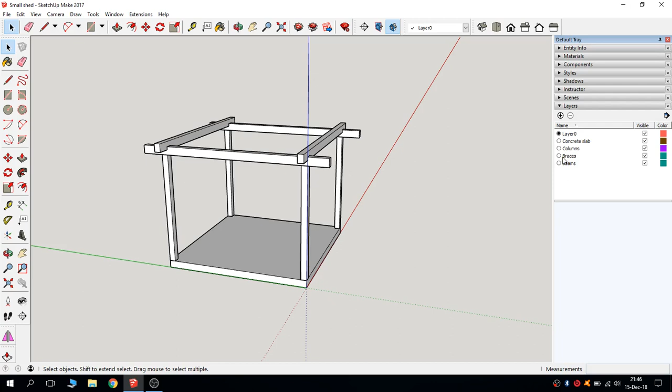Next thing we're gonna make are braces, so we're gonna make a layer called braces and activate it.

Now first we're gonna make braces that will tie this beam and this column. We're gonna use the tape measure tool and measure, for example, 70 centimeters.

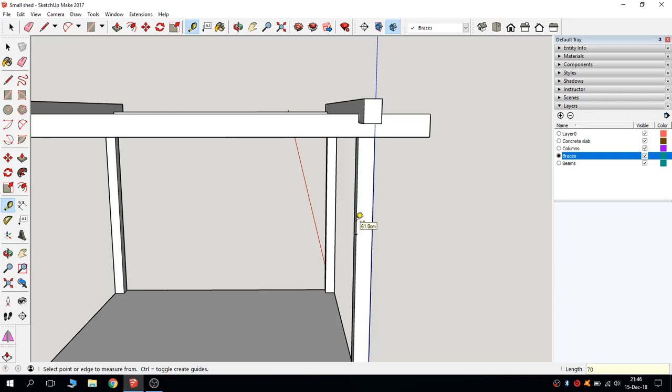Now we're gonna draw a rectangle in this point. Use the rectangle tool and type 14, 12 centimeters. Now we're gonna rotate this.

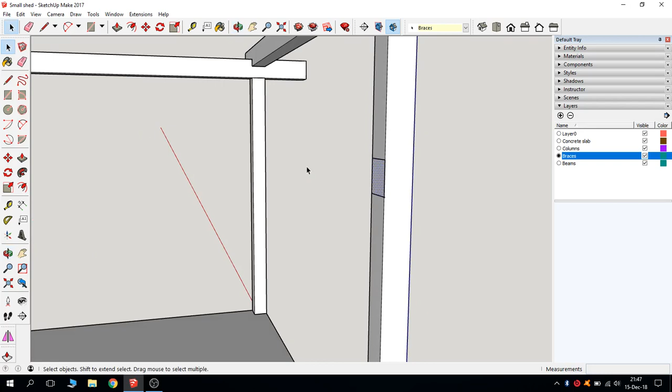Selecting this point, then rotate it for about 45 degrees. So this rectangle is now selected. You can check that by going to view and turning on X-ray, so you see there are dots. If it's not selected, you can turn on X-ray and then select it.

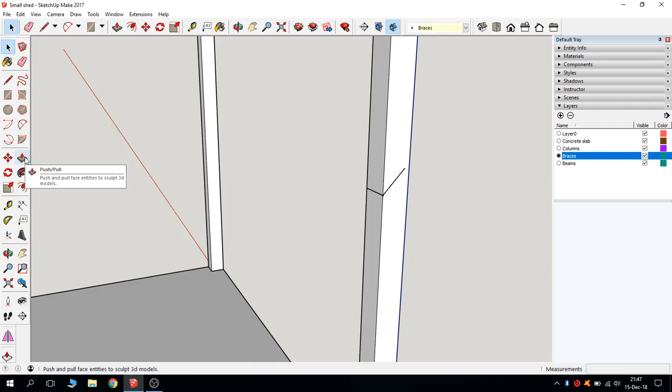Now I'm gonna turn off X-ray, select the push pull tool, and pull it upwards.

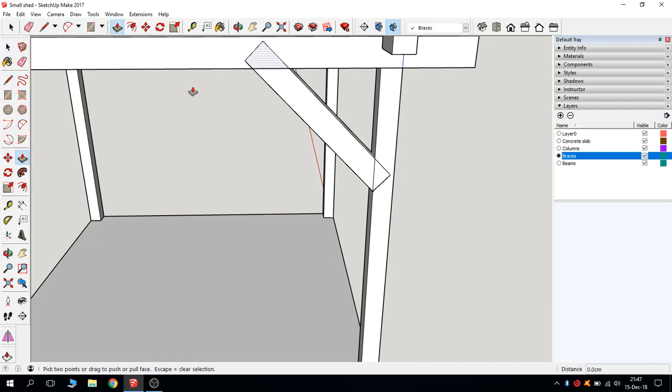Now we're gonna delete this surplus. We're gonna delete this dot. We're going to edit and delete guides, so it's not there anymore.

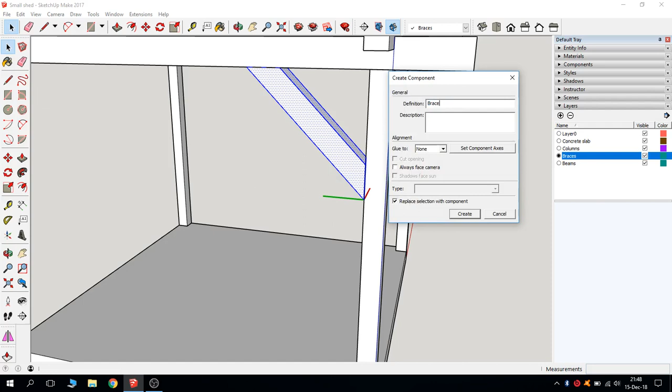Okay, we're gonna make this a component. Make component, and so call it brace.

Now we can move it to draw tenons. There's another way of modeling tenons - it can be modeled outside, then cut, then pasted in place when opening this brace. So we're gonna do it that way.

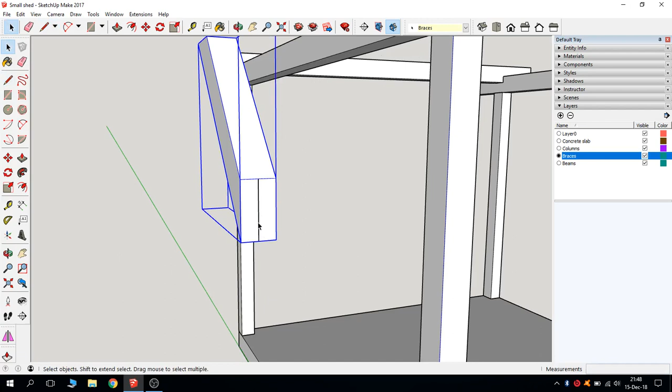So right now I'm drawing a tenon without a housing. If you want to make a housing, you can make it. So it will be 4 centimeters thick.

You can also go there for about 2 centimeters then. Okay, we don't need these lines.

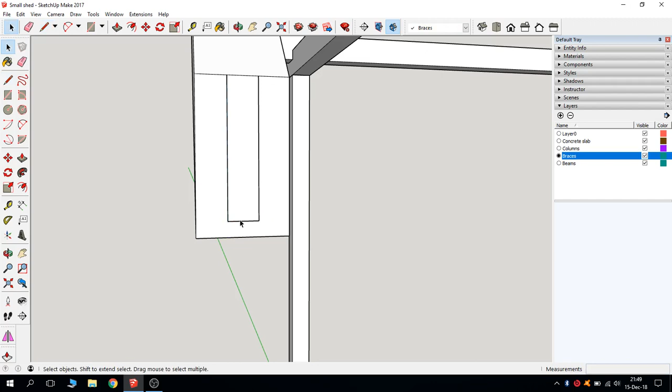Now we need to draw on this line so we can push pull it, and let's say 7 centimeters. Okay, so this is not possible, so we need to cut this triangle off.

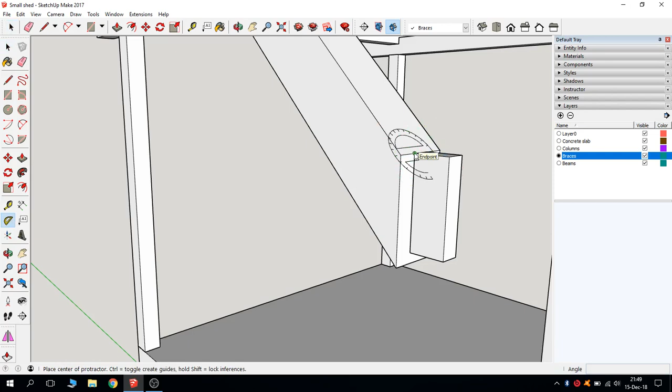I'm gonna do that by using the protractor to make a guideline. I'm gonna adjust this protractor with arrow keys. Now I'm gonna use a line, and we can delete this off.

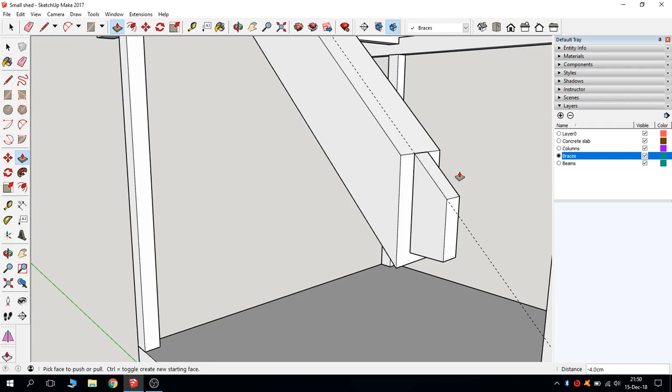Okay, we can delete this guide, and we're gonna turn this into a component. So make component, called brace tenon.

For brace, glue to any, cut opening, and this is really important to set the component axis. So we're gonna set them here, because we're gonna glue this tenon to the other end. So we're gonna create this.

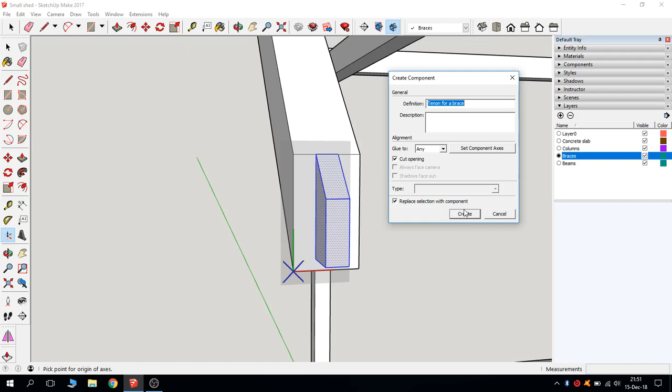Now we're gonna edit and cut it. Then we're gonna open this component and click on edit, paste in place.

Now right click and TF create joint. Now you can see it is a joint. Now we can make or add some pegs.

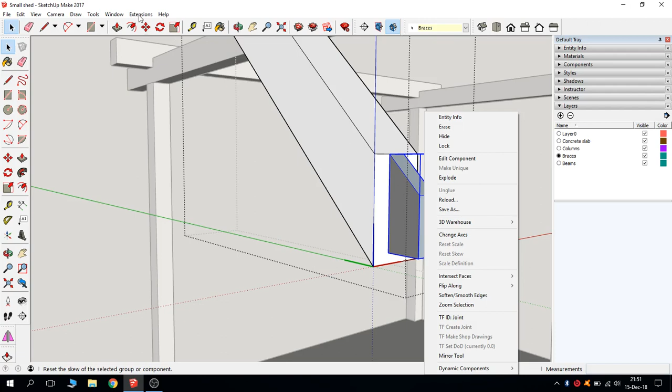So go to extensions, TF rubies, and TF peg tool. Click on this corner and type anywhere here. Then we're gonna change it, for example 7, 3.5, and we have our peg here.

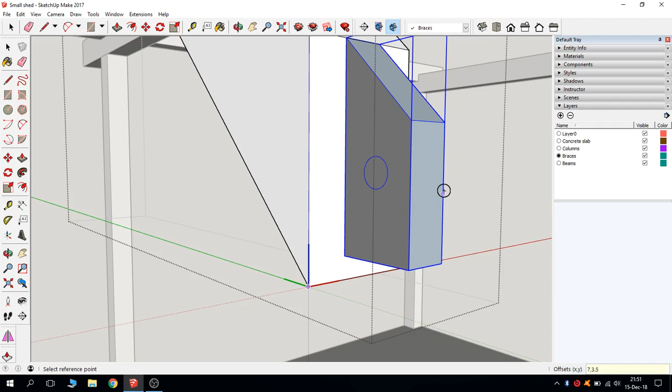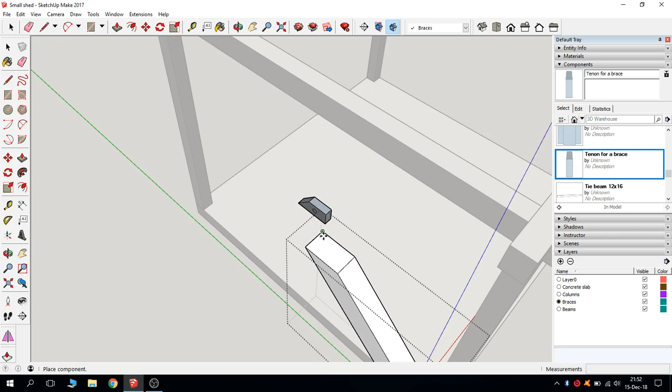Okay, now we can go to components, find our tenon for a brace, so it won't stick as it should, so we're gonna have to rotate it. Just be careful what dot you will use as a reference.

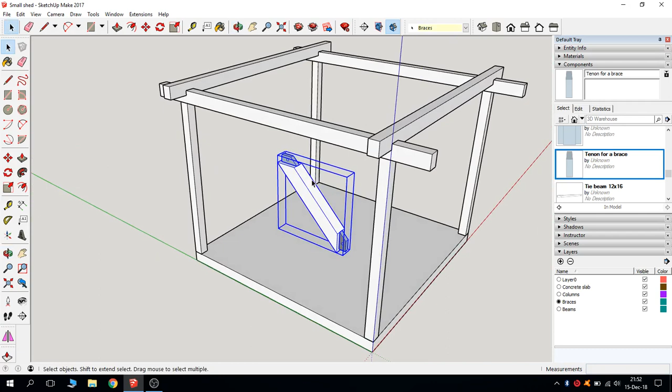And now we have our brace, so we're gonna put it back in place.

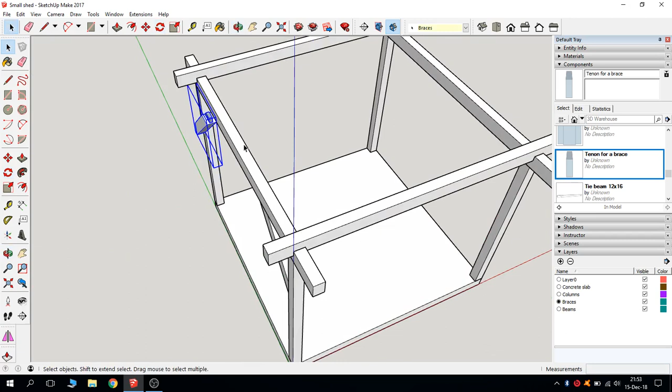Now we're gonna make a copy to this side using rotate, then press Ctrl, and now it's off because it was not rotated at the middle of this beam, but it's not a problem, so we will just move it inside of this frame.

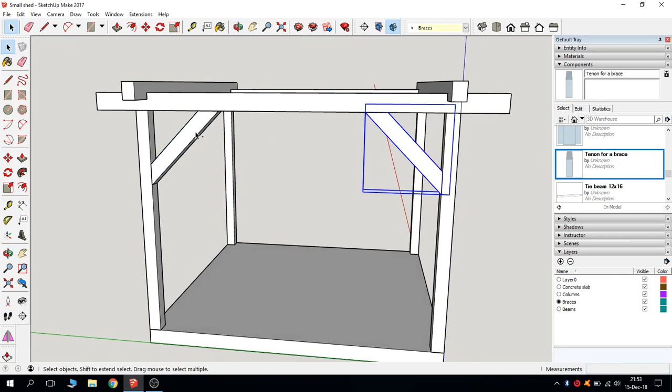So we're gonna select these, press Ctrl and select both of these, and copy them. Press Ctrl again, hold Shift, and we have our braces.

Now we need to connect this tie beam and post, so we can use the tape measure tool. We don't want our tenons to collide, so this should be shorter, let's say 60 centimeters.

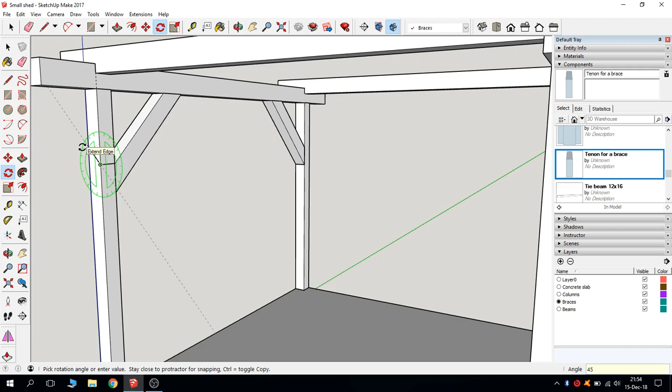Okay, so we're gonna repeat the process that we did before, let's say 14, 12, and again select it, rotate it, okay now push pull.

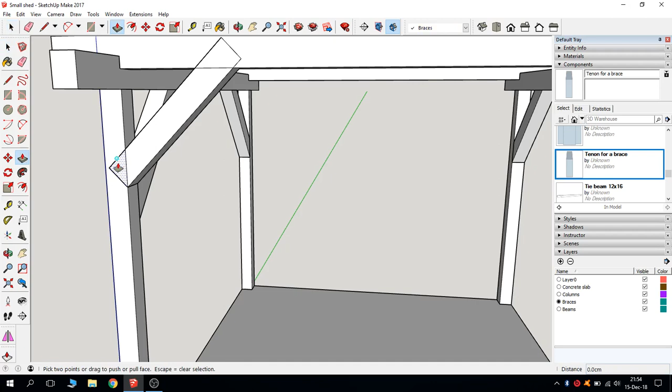Can delete that guide. Okay, we're gonna make this a component.

We can call this tie beam brace. Click create.

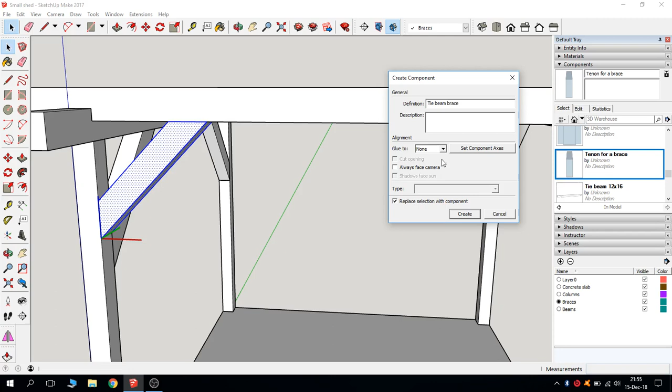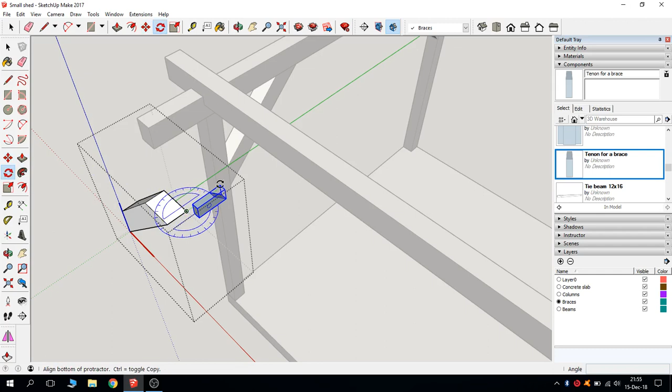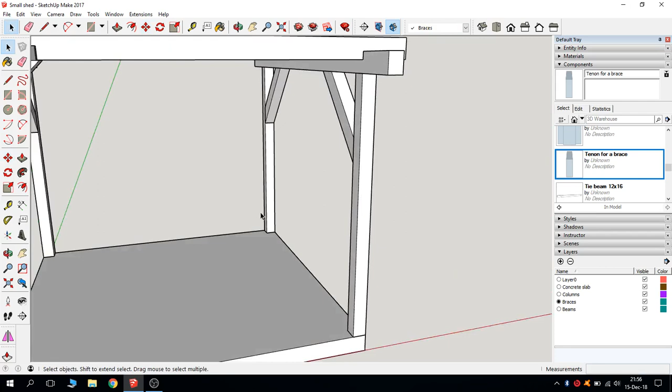Now we can move it and use tenons we made before. Okay, now we have our brace, so put it back together.

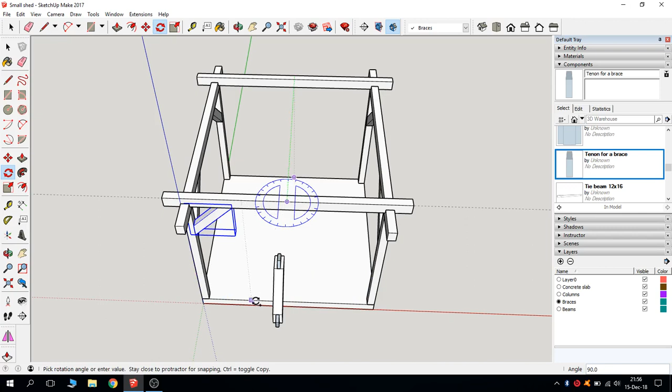And copy them to the other side. And we have our braces.

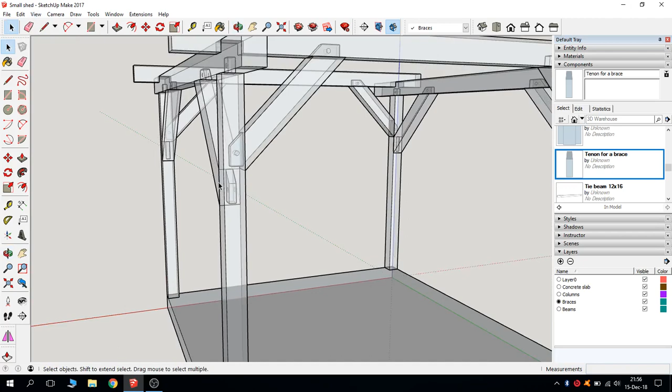So now we're gonna turn X-ray mode to see if these tenons collide anywhere. Go to View, Face Style, and X-ray. Now you can see they do not collide.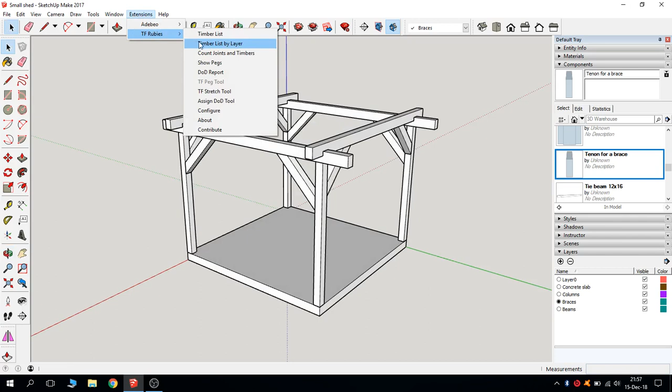Okay, we can turn off X-ray, and now we can turn on pegs. We have that in extension, TF rubies and show pegs. Now you can see pegs here.

And we have a new layer called pegs for presentation. If you don't want them, you just turn them off by unchecking here. And we made our braces.